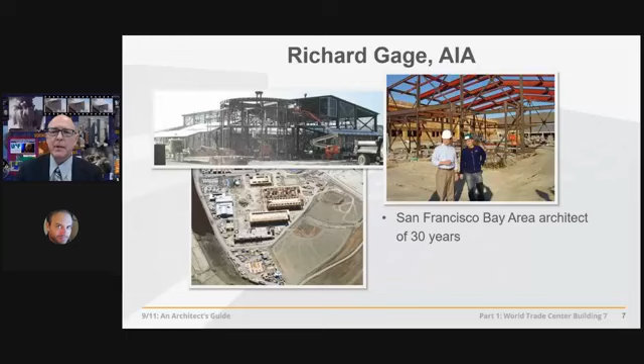Thanks, Andy. And just so people know something about my background, I was responsible at a local firm here in the San Francisco Bay Area for the construction documents for these $3 and $10 million gymnasiums and the construction administration for this $125 million high school. More recently, though, before launching full-time onto this important outreach effort, I had similar responsibilities working on this $400 million mixed-use project near Las Vegas with 6 blocks of retail, mid-rise office space, and parking structure, altogether about 1,200 tons of fireproof steel framing. I now work full-time educating architects, engineers, and others to understand what really happened at the World Trade Center using the material in these courses.

And so let's get into it. A lot of people didn't even know about Building 7. We go all around the country talking to engineers and architects at their conferences, and most are completely unaware of the third worst structural failure in modern history. I kid you not. This should be the most studied building failure ever. After all, it wasn't hit by an airplane, right? So if you didn't know about it, you're going to learn a lot. If you did know about it, we're going to brush up on the technical details so that you can share the information with others. Here's a 47-story skyscraper, easily the tallest building in most of our states.

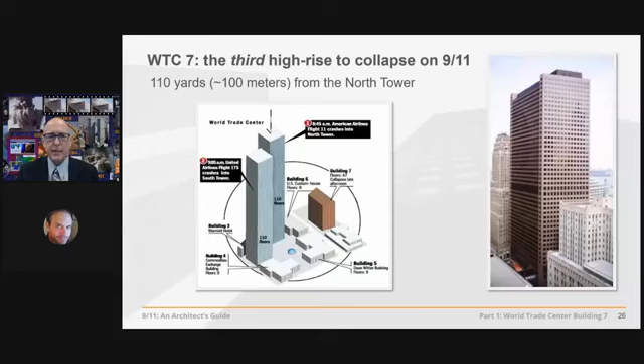The architect of record, Emery Roth and Sons, structural engineer Irwin Cantor, the developer Larry Silverstein. We'll get into him in a bit. It's part of the World Trade Center complex here in the northern part, and wasn't hit by an airplane. So it's a real important case study in structural failure. It was the third skyscraper to collapse. It's about 110 yards away from the North Tower. And it was hit by some of the laterally flying structural sections that were ejected out of the North Tower and started some fires, as you will see.

But here, the building is standing fine after the collapse of the towers all afternoon. So let's take a look at what happened to it here. The east penthouse falls first, and about 6 seconds later, the entire rest of the structure collapses. So we're going to be digging into this quite a bit today. So let's go to Shyam Sunder, the co-project leader of the NIST report, and see what the official story is here.

What we found was that uncontrolled building fires caused an extraordinary event. The collapse of World Trade Center 7 was primarily due to fire.

Fires? What fires? These fires, burning here at 2:30 p.m. on the east side of the building, burning here, same side of the building, and around the corner on the north side there, and over here also on the north side. So these fires are the worst fires that we have photographic or video evidence of.

And they progressed, by 2:30 or 3 p.m. they're moving away from the area associated with the initiation of collapse by NIST, under the east penthouse, because it collapsed first. They focused their collapse initiation theory there around column 79.

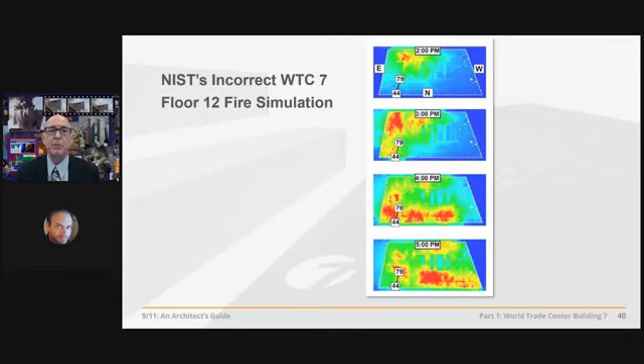Well, is that true? It can't be true, because NIST admitted itself that fires don't persist in any one area for more than about 20 or 30 minutes. In a modern high-rise building, that's all the fuel there is to burn. So they move on looking for fresh new fuel sources. As the photographs show, in fact, by 3:50 p.m., those fires are well beyond that area on the 12th or 13th floor, which is the focus of NIST's collapse initiation theory.

So we did our own fire simulation theory, and we note that the fire started, like NIST suggested, at 2 p.m., but it moved on. About 3 p.m., it's around column 79, and it's clear by 4 p.m., having moved toward the west. And in fact, on the floor, it's completely burnt out by 5 p.m. That's what the photographs and videos show.

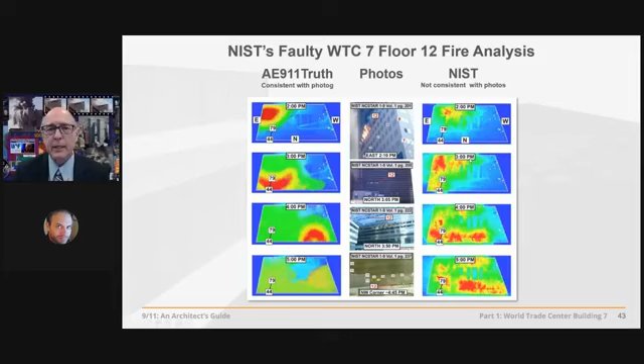And that's completely not consistent with the NIST fire simulation theory or their claims of massive fires in that area during the collapse. So that's just the beginning of the problems here for NIST. Let's see some of the others.

Our study has identified thermal expansion as a new phenomenon that can cause the collapse of a structure. For the first time, we have shown that fire can induce a progressive collapse.

Okay, so fires for the first time have caused a progressive collapse. And you can see on the screen, the column at the very right is column 79. And that's the column that first buckles, causing the floors to come down, followed by a quick succession of failures of adjoining columns. So this is their computer model, which they spent 6 years trying to refine, and it essentially debunks their own theory, and we'll get to that.

But what is their theory? That these long span beams, 50 feet long, in the fire were expanding just prior to the collapse due to the fire, which they say is burning at the time of the collapse. Well, we saw that those fires had burned out already, but they couldn't have expanded anyway because they're fireproofed. So we're halfway through the application of the fireproofing here. And we have 2-hour fire protection here, much longer fire protection than fires ever burned in this building. So they couldn't have been expanding.

But let's say they did expand. And this says they pushed this girder off of its seat on this column 79. Here's the girder. Here's the seat. Here's column 79. So that girder, though, could not have been pushed off of its seat because it would have had to have been pushed all the way off of that seat, 12 inches, in order for it to fall off.

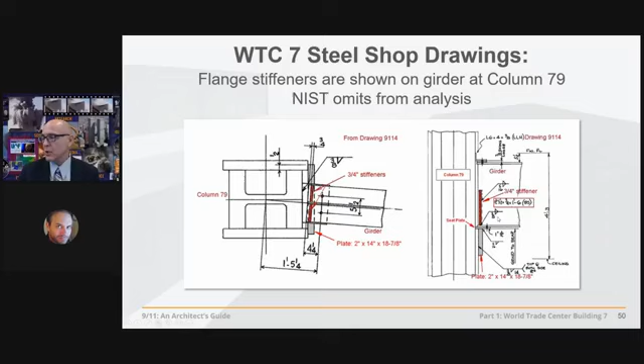call, they had to omit key structural components like these 3/4 inch stiffeners shown here in plan view and shown here in elevation view. They were there. They're on the shop drawings. So NIST omits them, citing that they were only there to prevent web crippling, so they didn't model them. Well, they would have also prevented that flange from folding at the bottom of that massive girder.

NIST also says that this girder got pushed anyway off of its seat. Well, it couldn't have been pushed off of its seat because there's 30 shear studs shown also on the shop drawings, which NIST somehow denies were there. So it's a real problem for NIST.

Also, they were there. And so this girder couldn't have just slid independently of the concrete slab up above because those shear studs tie that girder to the slab, and they were shown on the drawings. So this is clearly a fraud on the part of NIST. But let's go further.

Our study has identified thermal expansion as a new phenomenon that can cause the collapse of a structure. For the first time, we have shown that fire can induce a progressive collapse.

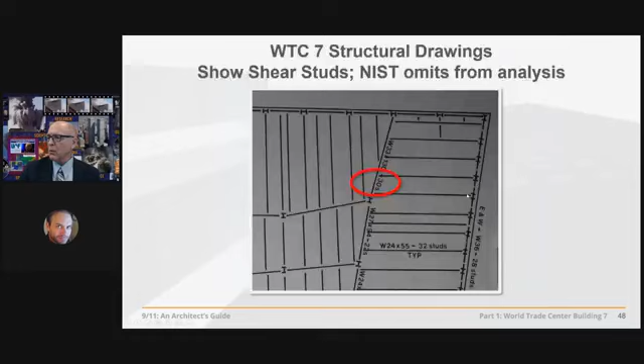Let's just say that all that could have happened, that the girder could have been pushed off the seat, and that it didn't have to be pushed off 12 inches, but only 6 inches, and it fell. Well, there's two other massive girders framed into this column, so they would have held that floor up.

But NIST somehow says, well, they all gave way too. But let's say that could have happened, and floor 13 fell on floor 12. And with what force would it have fallen? Well, it would have fallen with about 60,000 pounds of impact force. But that's 10 times less than what would be required to break the girder connections on the floor below.

Because they're framed exactly like the girder up above, as you see here, it would have taken 632,000 pounds to break that connection. But let's say that could have happened, and the connections were broken, and floor 13 fell on 12, broke those connections, and on for 9 floors.

Well, if that were the case, we would have had, NIST says, a massive caving in over those 9 floors, and that instability traveled all the way up to the east penthouse, which is why it starts to fall, and all the way down to the floor.

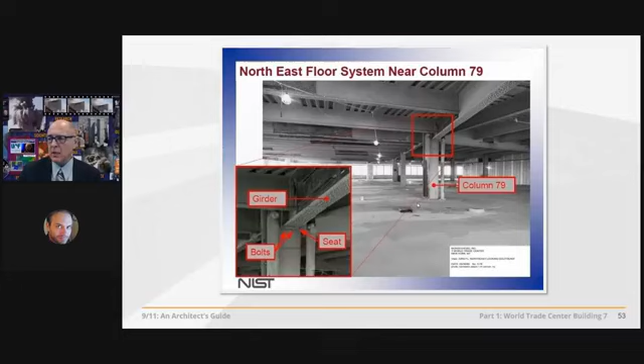Well, if you had such a massive set of structural failures on the east side of this building, you would have seen incredible deformation of the exterior structural steel frame. It would have crumpled up like a beer can, telegraphed to the outside of the building, which we didn't see in the photos or videos of this building's collapse. We would have had massive breaking up of granite panels and windows by the thousands. We didn't see that either.

Here's NIST's computer animation. Here's our structural model showing the building collapsing, which matches quite well with the video of the event.

Well, somehow the entire east side is collapsing in on itself. And what do we see here? The breaking up of 400 structural steel connections per second, like firing a hose on a sandcastle. And of course, they only model the east side, so we don't even know how that propagation of failures might have extended over to the west side, and they stop it after 2 seconds.

Let's look at it compared to the real video and see if it does match quite well, as Shyam Sunder says. The east penthouse matches, but from there on, it's a complete divorce. There's no breaking up of granite panels, windows on a massive scale, only about a dozen windows or so in the actual video of the collapse. And their computer animation stops after just 2 seconds. Why? They had 5 years to perfect this.

Well, it begins to tip over, as any collapse beginning lower in the building would be expected to do. But the video of the actual collapse betrays that theory of NIST. Something else is going on here, which we'll be looking at. So they simply stop their computer animation after 2 seconds.

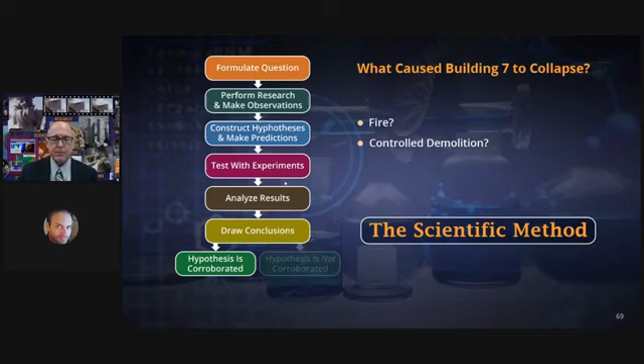experiments after making predictions, analyze the results, draw conclusions. If the hypothesis is corroborated, we report the results in an open, transparent manner so all can build on the body of the work that we do.

We report the results then in an open, transparent manner. We don't hide the computer input data from architects and engineers and scientists, citing that it might jeopardize public safety if we were to release this valuable data that we keep in our black box.

If the hypothesis is not corroborated, we go back and construct a new hypothesis that stands a better chance against the experiments, the observations, the research, the results, and the conclusions, until we have a hypothesis that is corroborated by all the above. So with that in mind, let's proceed and do some background research and find out how have other high-rise buildings come down.

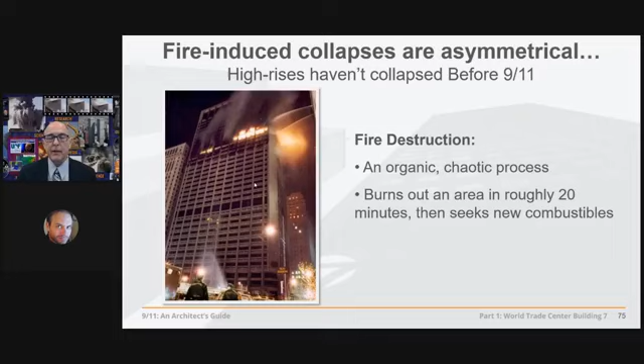Not due to fire, but say in a wood frame building, a fire being an organic, chaotic process, burns through an area in about 20 minutes or so, looking for fresh new combustibles. So NIST acknowledges that fires don't persist in any one area for more than 20 or 30 minutes, even though they claimed that in Building 7, they persisted for more than 2 hours in a particular area around column 79.

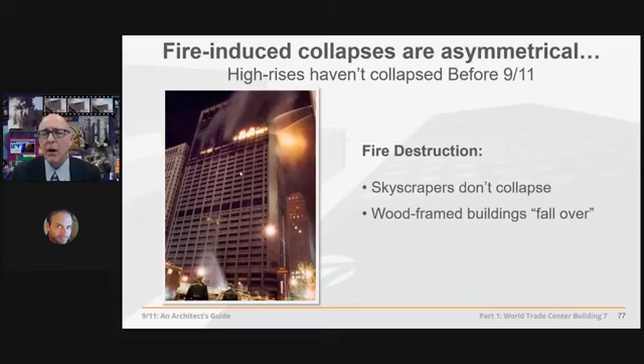So in a wood frame building, though, we would expect certainly some damage, and so they tend to fall over, to the path of least resistance after the fire burns out a structure asymmetrically, because this is a chaotic process. It doesn't just burn, or the collapse doesn't happen straight down through the tons of cold, hard structure below the fire. So what happens in a steel frame building?

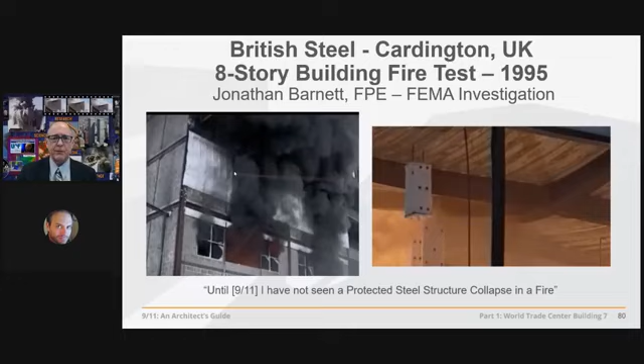Well, we have the largest test of its kind by British Steel in the UK. An 8-story building was set on fire, made out of steel, some of it fireproofed, some of it not. They found some astounding results in this fire. Let's take a look.

This was the largest test of its kind ever conducted. It showed how unprotected steel can be distorted, even by a normal office fire. But as is typical in steel buildings, the structural beams only slowly and progressively warped and sagged. There was no chance of a sudden collapse.

In over 20 years, I have not seen, until recently, a protected steel structure that has collapsed in a fire. Until recently, of course, he's referring here to 9/11, when we had not 2, but 3 protected steel structures collapse primarily due to fire.

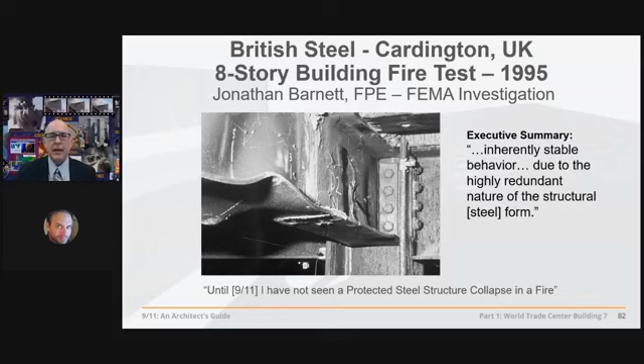Why don't steel frames collapse, even when they're not fireproofed, as we see here? The connections don't fail. The beams can sag, but they typically don't fail beyond the sag. Well, let's look and see why that might be true, because there's dozens of examples to choose from here.

May 4th, 1988, the First Interstate Bank, a 62-story building in Los Angeles, California, suffered a 3.5-hour fire which burned across 5 floors and caused an estimated $200 million of damage. It did not collapse. February 23rd, 1991, the One Meridian Plaza, a 38-story building in Philadelphia, suffered an 18-hour fire which burned across 8 floors.

The fire caused an estimated $100 million worth of damage, and 3 firefighters died fighting it. It was later described by officials as the most significant fire of the century. It did not collapse. October 17, 2004, the East Tower of the Park Central complex in Caracas, Venezuela, suffered a 17-hour fire which spread across 26 of its 56 floors. It did not collapse. August 18, 2007, a fire broke out on the 17th floor of the Deutsche Bank building

in New York, a building undergoing deconstruction after being heavily damaged by debris from the South Tower on 9/11. Originally 41 stories in height, it had been reduced to 26 at the time of the fire, which lasted 7 hours and affected a total of 10 floors. 2 firefighters died of smoke inhalation. It did not collapse. On 9/11 itself, 5 World Trade Center, a 9-story building east of the North Tower, was engulfed in flames after sustaining heavy damage from falling debris. A number of partial collapses occurred, but the overall structure remained standing.

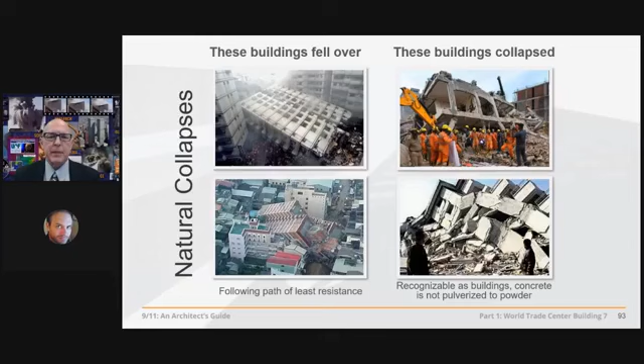They set shaped cutter charges at the columns and beams in the building and take out the structure within seconds, starting in the interior first and working themselves out in less than a second, usually to the exterior.

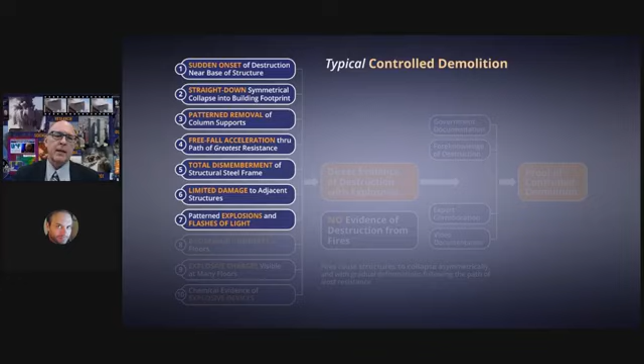And then that results in the total dismemberment of the structural steel frame, something natural collapses don't do, as we saw, resulting also in limited damage to adjacent structures. Ideally, that's one of the goals of controlled demolition. And there's a patterned set of explosions heard by witnesses, seen by them.

Broken up concrete floors. You don't want to have to go into this controlled demolition and manually jackhammer those floors up at all odd angles. Let the explosives do that work. So the floor is shattered.

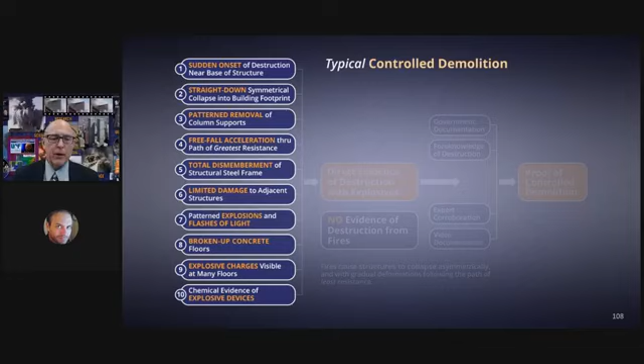Explosive charges, therefore, are left behind in the residue. We have evidence of them, and so chemical evidence of those devices, but also, with regard to feature number 9, explosive charges going off in the building, isolated explosive ejections called squibs, obviously explosives going off, which leaves behind chemical residue. So we look for those, and that is all direct evidence of destruction with explosives. None of it can be attributable by fire, let alone all of it. So if you have all these features, you know you have direct evidence of explosive destruction.

Fires cause structures to collapse asymmetrically with gradual deformation following the path of least resistance. So with additional circumstantial corroborative evidence, such as government documentation, that can be very helpful, foreknowledge of the destruction, by workers and engineers and so forth.

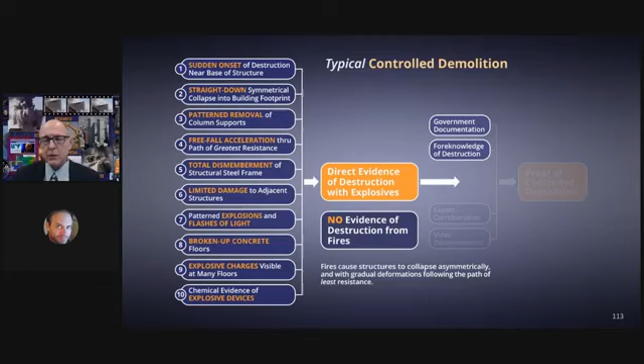Experts agreeing that was a controlled demolition—well, at least those experts without financial or political obligations which might sway their objective opinion on whether something's a controlled demolition or not. And video documentation, of course, all this can be proof of controlled demolition.

Now we're going to apply that model of proof at this time to Building 7 and see if we have these features. Let's begin with: is there a sudden onset of destruction near the base of the building?

Well, let's listen to Dan Rather as we watch this additional video of Building 7's collapse at 5:20.

It's amazing, incredible, pick your word. For the third time today, it's reminiscent of those pictures we've all seen too much on television before, when a building was deliberately destroyed by well-placed dynamite to knock it down. What? What did you say, Dan? Deliberately destroyed by well-placed dynamite to knock it down? Well, that's exactly what it looks like. We've all seen the old hotels in Las Vegas that come down due to controlled demolition, and as we'll see, there's no difference.

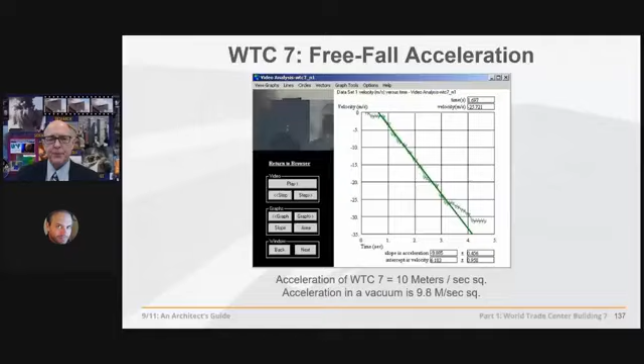This is pretty important. Let's listen to David Chandler, physics teacher. Just by watching it, anybody can see that Building 7 fell close to free fall. To measure it, I used software to track the corner of the building and compute a graph of downward velocity as a function of time. The graph had a long, straight section indicating constant acceleration. Measuring the slope, I found the acceleration to be within 1% of the acceleration of gravity for the first 2.5 seconds. In other words, the building fell through its own structure with zero resistance, as fast as a bowling ball falling out of the sky.

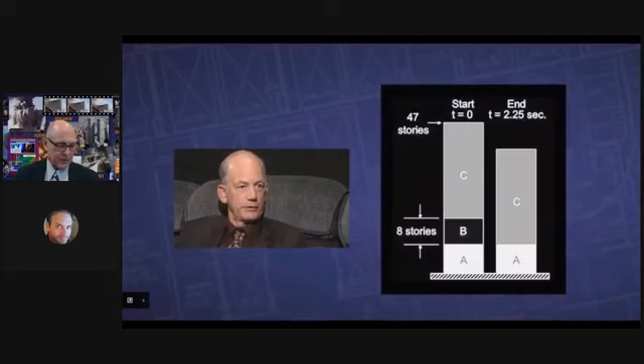This building had 40,000 tons of structural steel in its structural system, intended to keep it from going anywhere. NIST is telling us that the building below it ceased to exist for the first few seconds of the collapse. Well, things in physics just don't cease to exist and cease to resist the forces that are on them. The building didn't disappear, so the building can't fall for 100 feet at free fall speed. That's impossible. That's a violation of the fundamental law of physics that says that for every action, there's an equal and opposite reaction.

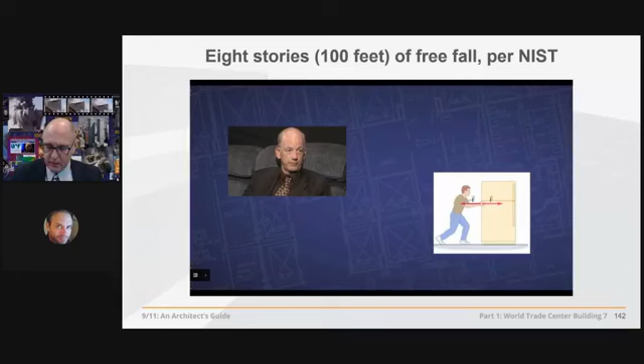Well, guess what? NIST was publicly embarrassed into acknowledging the free fall of this building, as fast as a bowling ball falling out of the sky, for a third of its 7-second collapse, because members of AE 9/11 Truth were there at the conference. They called them on it. They finally admitted it and actually published it in their report, but they don't acknowledge the implications of that. The implications are that if it fell at free fall, then the columns didn't buckle. Something else happened to them. They were removed instantly. How does that happen?

So we go further. Do we have feature number 5? The total dismemberment of the structural steel frame. Here we have a 47-story skyscraper, a moment-resisting structural steel frame where the columns and the beams are rigidly welded one to the other so they don't do this - columns, beams. And yet they're collapsing like a house of cards into a pile about 6 stories tall. How can that even happen? We'd expect a 20-story pile that wouldn't even look like pancakes. We'd expect it to tip over, not come straight down, like buildings that collapse due to natural causes, like earthquakes.

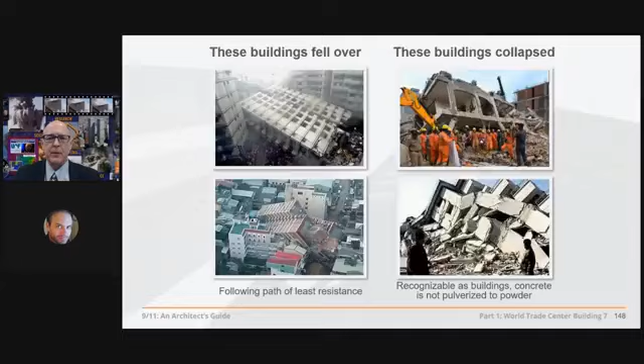Do we have limited damage to adjacent structures? Feature number 6, fairly limited damage, yeah. There's some damage to the post office and the Verizon building, but it's minimal.

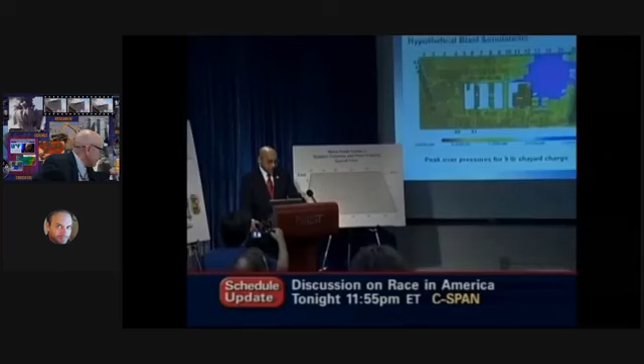Feature number 7, sounds of explosions heard by credible witnesses. Let's first go to NIST, the National Institute of Standards and Technology, who was tasked by Congress to explain these collapses to the American people. We did not find any evidence that explosives were used in the collapse of Building 7. We ran detailed computer simulations of blast scenarios. This size blast would have produced an incredibly loud sound that was not reported on videos of the collapse, nor reported by witnesses. No? Well, let's take another look here and see if that's actually true.

We were watching the building because it was on fire. The bottom floors of the building were on fire, and we heard this sound that sounded like a clap of thunder. We turned around and were shocked to see that the building - it looked like there was a shock wave ripping through it, and the windows all busted out. It was horrifying. About a second later, the bottom floor caved out, and the building followed after that - we saw it crash down all the way to the ground. We were in shock, and then the worst part. Wow. A shock wave ripping through the building, a sound like a clap of thunder, windows busting out, and then the building coming down.

How about this witness?

And then it was like another 2-3 seconds. You heard explosions, like boom. It's like a distinct sound. It's not like when in compression, like boom, boom, boom, like floors that were dropping and collapsing. This was boom, and like you felt a rumble in the ground, like almost like you wanted to grab onto something. That, to me, I knew that was an explosion. There was no doubt in my mind.

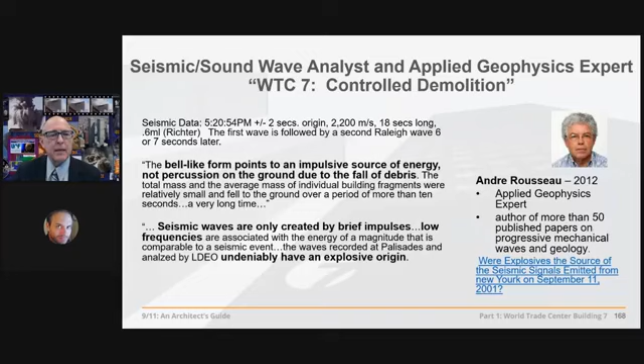Well, let's go to Andre Rousseau, applied geophysics expert, author of more than 50 published papers on progressive mechanical waves and geology. What does he say? The seismic data, he says, has a bell-like form. It points to an impulsive source of energy, not percussion on the ground due to the falling of debris, especially spread out over many seconds, according to the NIST theory, 30 seconds or so. Seismic waves are only created by brief impulses, low frequencies. These undeniably have an explosive origin.

So that's his conclusion. So we move on to feature number 8, the pyroclastic-like clouds of pulverized concrete. What? Well, the National Fire Protection Association Guide 921 for Fire and Explosion Investigations says look for large volumes of gas and the large amount of heat released in chemical explosions, causing rapidly expanding plumes of hot gases.

So this would be something different than high energy explosions. What are we getting at here? Well, as seen from every direction racing away from the collapse of Building 7, just like in the Twin Towers, actually, 35 miles an hour, these rapidly expanding cauliflower-shaped plumes of expanding gases with this solidly defined edge, this rapid expansion is an indication of an incredible heat source fueling it.

What could that be? This is only our first look at this. It's not these small scattered fires that we see in Building 7 prior to the collapse. Surely those would have been extinguished in the collapse itself. We're talking about something on the order of this, an incredible heat source.

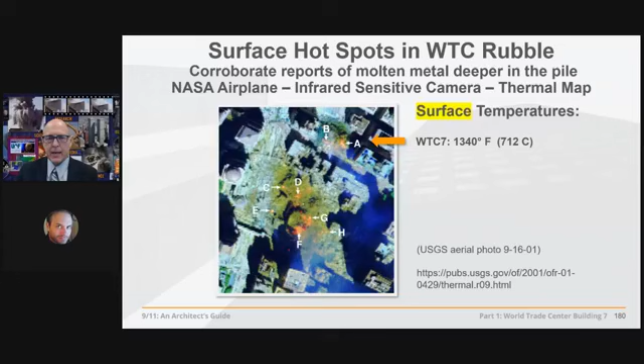Let's look further at feature number 9, molten steel and iron. What are we talking about here? Well, documented by NASA's infrared sensitive cameras, thermal imaging, documenting incredible temperatures on the surface of this building's collapse of 1,340 degrees Fahrenheit. Well, there's no fire on the surface. The fire was surely put out by the collapse of the building.

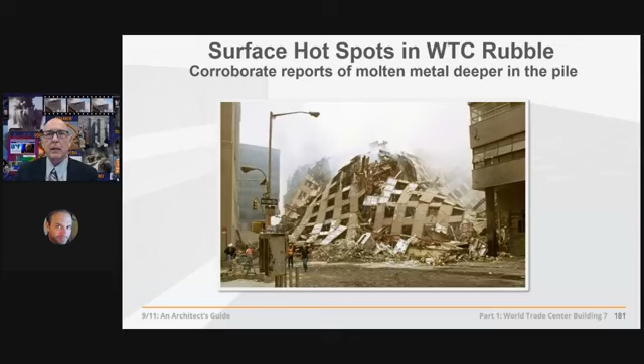So what's burning here? Something deeper down in the pile that's much hotter than these temperatures, that when it rises to the surface, it actually is cooling down to 1,340 degrees. Let's look deeper. Here's Abolhassan Astaneh-Asl, who was a professor at Berkeley's structural engineering department, and he had unlimited access to the Fresh Kills landfill, at least before they took the steel away from him while he was looking at it. But what does he say?

I saw melting of girders in World Trade Center. I saw melting of girders in World Trade Center.

Well, wait a minute. Girders don't melt at fire temperatures, normal office fire temperatures, of which 1,340 degrees is one of the hottest office fires that occur. Normally they're around 500 or 600 degrees. So what can melt steel girders? We're talking over 2,800 degree Fahrenheit temperatures,

prompting the author of the FEMA report, Jonathan Barnett, who says steel members in the debris pile appear to have been partly evaporated in extraordinarily high temperatures. Well, it takes 4,000 degrees Fahrenheit to evaporate steel. That cannot possibly be accounted for by office fires. We're talking at least 4 times the temperatures created in modern office fires.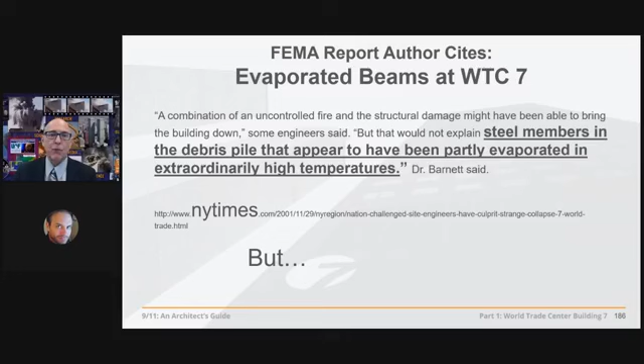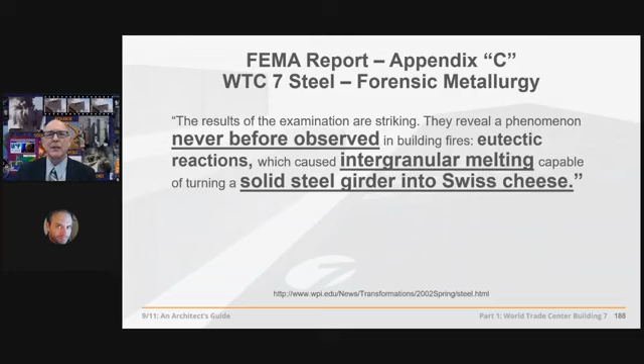So we go to FEMA Appendix C, produced by FEMA for Building 7 and the Twin Towers. Appendix C, in their May 2002 Building Performance Assessment Report, produces a limited metallurgical examination. So this should be revealing. What do they observe? Never before observed eutectic reactions, intergranular melting, capable of turning a solid steel girder into Swiss cheese, like we see here in this piece of Building 7 steel.

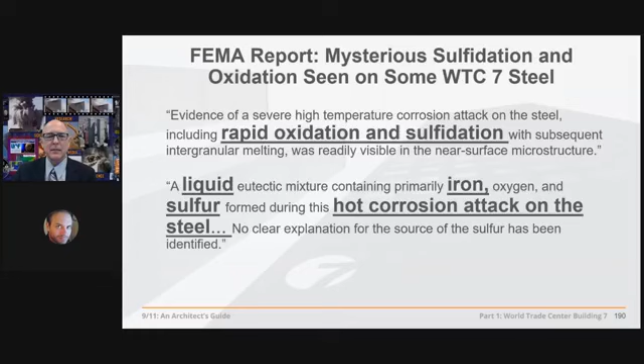How can that possibly happen due to fires? Office fires, not even jet fuel, melt steel. And remember, no plane hit this building. We have rapid oxidation, sulfidation, liquid iron, that's molten iron, 2,800 degrees Fahrenheit. Hot corrosion attack on the steel. Perhaps the deepest mystery uncovered in the investigation, says the New York Times, and yet it's completely ignored by NIST.

In fact, it was removed in the NIST report when NIST took over this investigation in 2002 from FEMA and then produced their report 6 years later. What do they say? Well, we couldn't test. There's no steel recovered. Again and again. No steel recovered from Building 7.

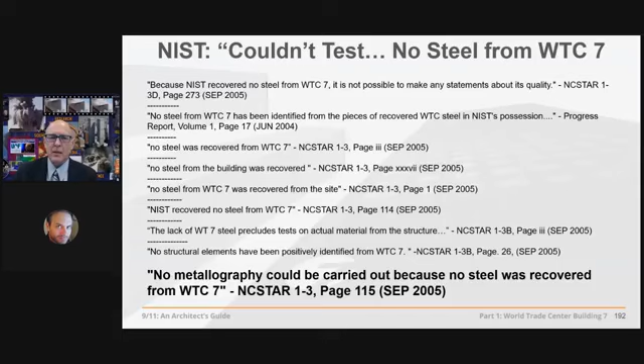But we just saw the actual piece of steel provided to FEMA by John Gross, the co-project leader of the NIST report, who's here photographed with that very piece of steel that they documented and found liquid molten iron, hot sulfur corrosion attack on the steel that's capable of doing this. His shadow is all over the evidence.

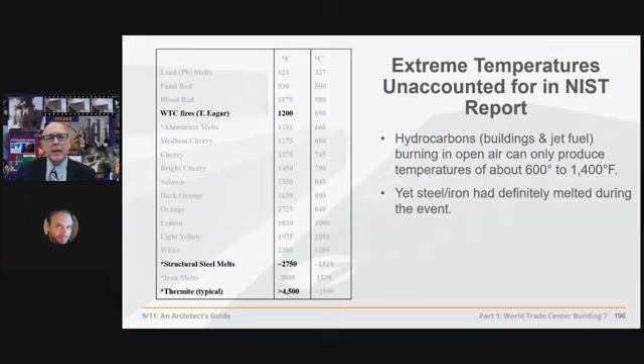Well, what can account for this? I mean, hydrocarbons, which are in buildings, and even jet fuel, only produce 600 to 1,400 degree temperatures, more typically 500. Yet steel had definitely melted during the event, as we see here in the material pouring out of the debris held in the jaws of this crab claw excavator. The physics tells us the temperature of liquid molten materials like this. We're exceeding 2,500 degrees. Liquid molten iron, white hot even, pouring out of there.

How can it be accounted for? So what caused it to melt? Let's look for something that can. How about thermite? That's a possibility, because thermite produces these characteristics, as you'll see. Could it have produced this? Well, what is thermite anyway?

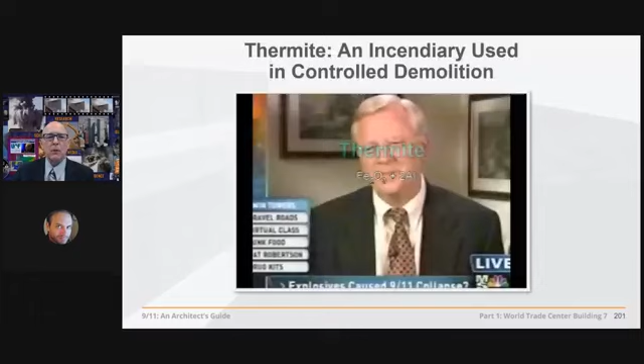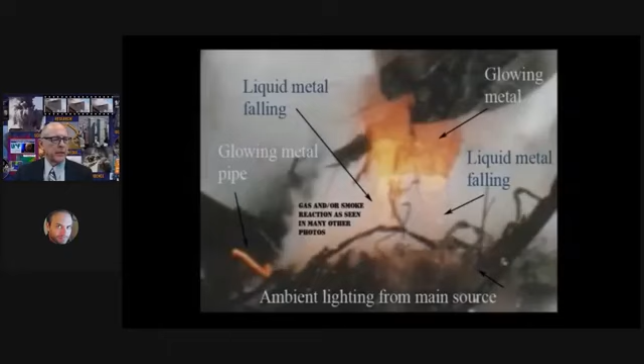An incendiary used by the military, thermite is a compound of iron oxide and aluminum, which when ignited sustains an extreme heat reaction, creating molten iron. In just 2 seconds, thermite can reach temperatures over 4,500 degrees Fahrenheit, quite enough to liquefy steel. We know that open-air fires cannot burn hot enough to melt steel, but metal had melted at the base of the towers.

Appendix C of the FEMA report describes sulfur residues on the World Trade Center steel. The New York Times called this the deepest mystery of all. Sulfur slightly lowers the melting point of iron, and iron oxide and iron sulfide had formed on the surface of the structural steel. Sulfur used with thermite is called thermate, producing even faster results.

Hey, maybe we're getting somewhere here, because if thermite were used, it would explain the incredible heat. It produces 4,500 degrees as its byproduct. And what does it produce? It produces liquid molten iron at those temperatures. And we'll see plenty of evidence for liquid molten iron coming up.

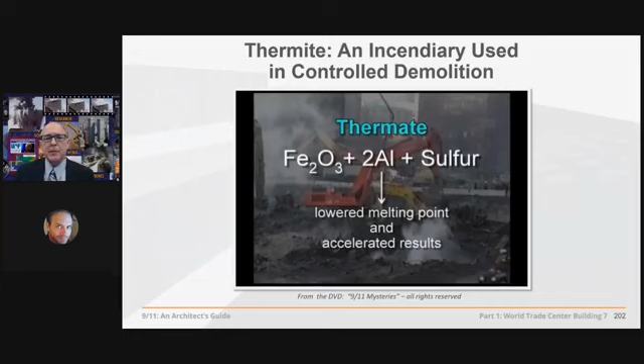It would also produce sulfur, because sulfur is added. It would account for the sulfur that FEMA found in Appendix C. Sulfur is added to thermite to become thermate, much more effective at cutting through steel. So this is absolutely extraordinary. But is there evidence for it?

Well, did NIST investigate for such things? No, they didn't, as you'll see. But others did. And Stephen Jones, professor, says, look for unusual residues that could arise from thermite or magnesium. NIST found no corroborating evidence to suggest that explosives were used. Well, wait a minute. Did you look?

A year later, they acknowledged in writing, NIST did not test for the presence of explosive residues. Wait a minute. You can't find what you're not looking for or won't look for. Others did, though, and it wasn't that hard to find. Stephen Jones, a nuclear physicist formerly from Brigham Young University, is sent some material from the ends of the beam provided to him by the sculptor of one of these many sculptures that were done throughout the United States and around the world.

One of the first things that Stephen notices is that you don't have this crazy jagged pattern in the ends of the steel beams produced by the iron workers at the site cutting the steel beams. They produce very efficient lines with their oxyacetylene torches and thermal lances, not these crazy zigzags. So there's something else going on here.

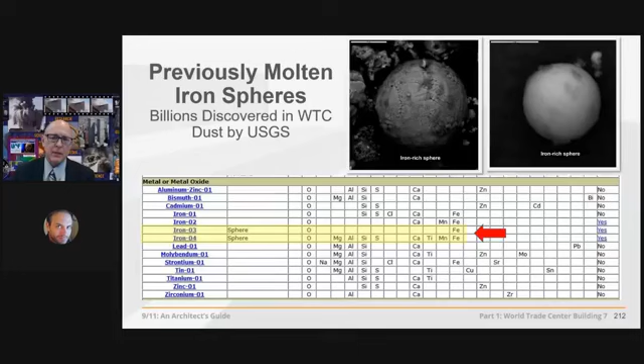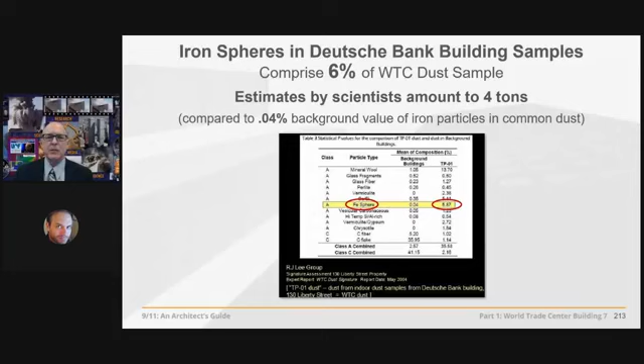This is really curious. Up to 6% of the World Trade Center dust samples are composed of these previously molten iron microspheres, amounting to up to 4 tons by extrapolation from how many they find in the actual samples. 150 times the background level of iron particles in dust, which you can get in background dust, as you see here in this sample. But it's not spherical. So something else is going on here.

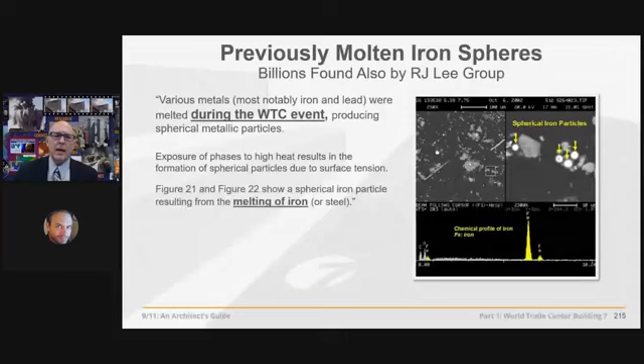R.J. Lee finds that these are formed during the event, not before by the construction workers welding, not afterwards, after 9/11, by the iron workers cutting with steel torches, but during the event. So they're so ubiquitous that they're used by the EPA as a signature component to distinguish World Trade Center dust from common office building dust.

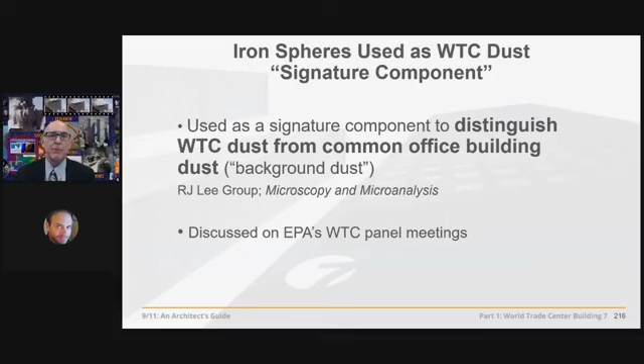Well, how would they even get in the dust? What's one possibility? Well, here's a controlled experiment using thermite. Under controlled conditions, we see here, slowing it down halfway, thousands of sparks. Well, those aren't really sparks. Those are liquid molten iron spheres that cool and fall as spheres in the dust. Why does that happen? Well, aerosolized liquids form themselves by surface tension into these extremely small droplets, magnified here.

That can account for the process if thermite were used under explosive conditions. That liquid molten iron would be aerosolized, and it would fall on the tops of the cars and the ground, toasting them. Perhaps that's a reasonable explanation as to the toasting of the tops of these cars in this extremely high heat event at the World Trade Center.

What other rational explanation is there in this high heat, extreme heat event? Well, you can make shaped cutter charges out of thermite in your own backyard, as civil engineer John Cole did. And this is what you get. And here's the process.

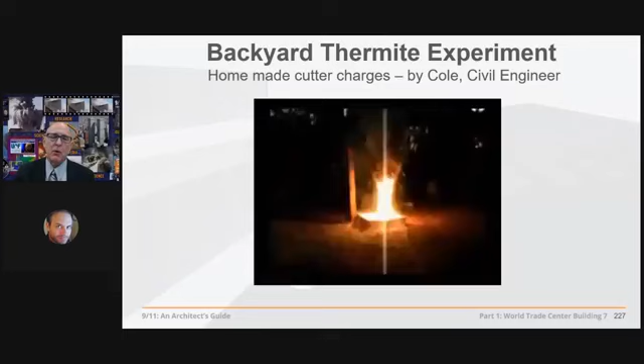So the explosions are heard, but they're actually muted, and they can cut through steel beams, as you see here.

Well, there are devices that are much more sophisticated than John Cole's backyard experiment. They're patented devices, shaped cutter charges that issue molten iron in hundreds of milliseconds through structural steel, much thicker sections than high energy explosives like C4 and RDX can penetrate. So perhaps that's one of the reasons that thermite cutter charges were used here. And we'll be showing you the evidence of this.

But why wouldn't they use C4 or RDX, traditional high energy explosives? Why else might they not use that? Well, they provide an extremely loud audio signature, a loud bang, and a visual signature, an extremely bright flash. So maybe they wanted to avoid that by going to something that would leave less evidence.

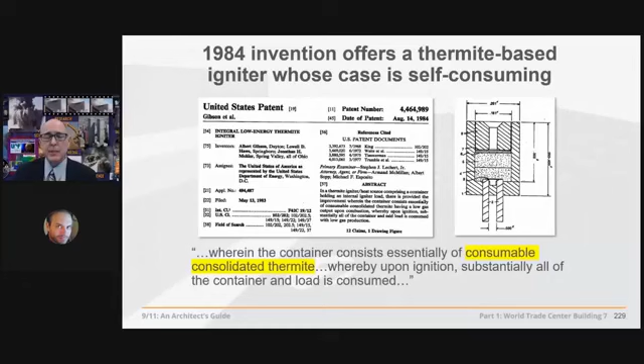In fact, there are devices patented prior to 9/11 whose casings themselves are made out of consolidated, consumable thermite, which would be consumed, leaving only molten iron as the byproduct. Well, pools of molten iron are discovered throughout the World Trade Center, as we'll see in next week's episode 2 of this 3-part series, 9/11: An Architect's Guide.

But what else was found in all this World Trade Center dust? A team of scientists led by Niels Harrit in Copenhagen collected 7 samples from around the World Trade Center, including a sample from across the street from World Trade Center 2, from Janette MacKinlay's apartment.

She collected it. She was an artist. She paid for that decision with her life later, as she was working with this dust in sculptures, part of her own therapy for having been traumatized when her windows blew in from the tremendous explosive force of the South Tower. She succumbed to brain cancer years later.

Very tragic. But her sample, provided to Stephen Jones, is one of the 4 samples documented in the peer-reviewed study. Up to 10 tons of this material was estimated to be in all the World Trade Center dust, by extrapolating the amount found in the dust samples they collected.

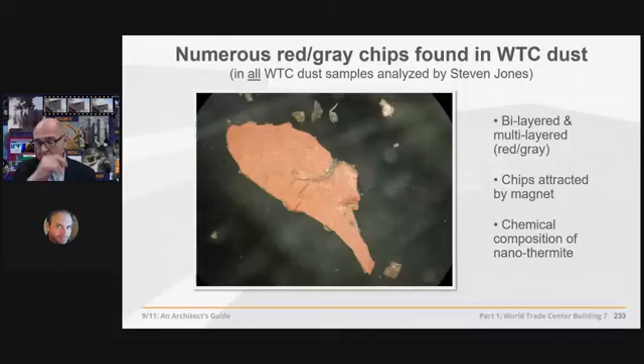These huge quantities of this material: it's red on one side, gray on the other, dual-layered red-gray chips, and it's attracted by a magnet. So they get very curious and zoom into the red layer, studying it with X-ray energy dispersive spectroscopy, finding aluminum and iron — the signature of unignited thermite. Thermite is made of aluminum and iron oxide particles, basically rust and aluminum, finely mixed.

And here with silicon, oxygen, and carbon — we'll come back to that. So they get even more curious and zoom into the red layer 50,000 times, finding nano-sized particles, 1,000 times smaller than the diameter of a human hair: particles of iron oxide crystals and aluminum platelets, the ingredients of thermite, set in a bed of oxygen, silica, and carbon.

Organic material is used in the explosive TNT; it's what causes the expansion of those gases. Here it's used as the matrix for these other incendiary materials. So we appear to have something engineered to become more explosive and incendiary, which works by means of heat — massive heat, 4,000 degree temperatures — to become even more explosive.

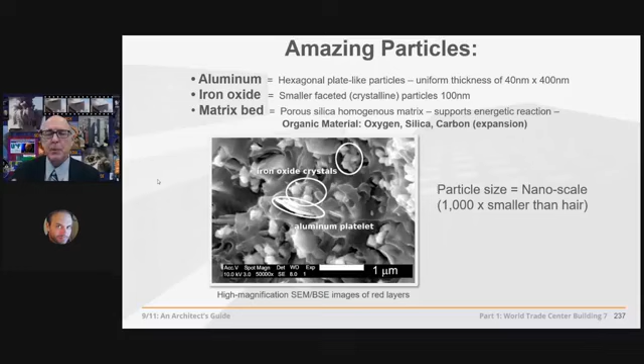The documented literature shows that their samples, in exothermic reactions, produce temperatures around 420 degrees Celsius, 788 or so Fahrenheit. They react. Well, here in these traces collected by the international team, we find that they do the exact same thing.

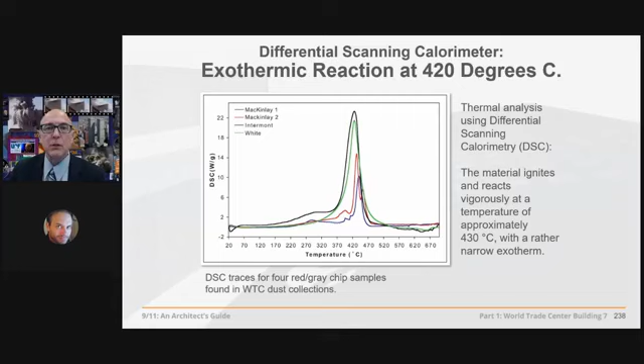They ignite. What happens when they ignite? They produce molten iron microspheres with the same chemical signature as the molten iron microspheres found in the World Trade Center dust. So we know where those tons of molten iron microspheres came from.

There's no question they came from these dual-layered red-gray chips, because there's no other source that FEMA, NIST, or anybody else has fingered as a possible suspect that makes any sense. So we have a self-corroborating, repeatable set of experimental data that could put a lot of people, the real perpetrators, away for a long time for mass murder and treason, which is where this evidence is heading.

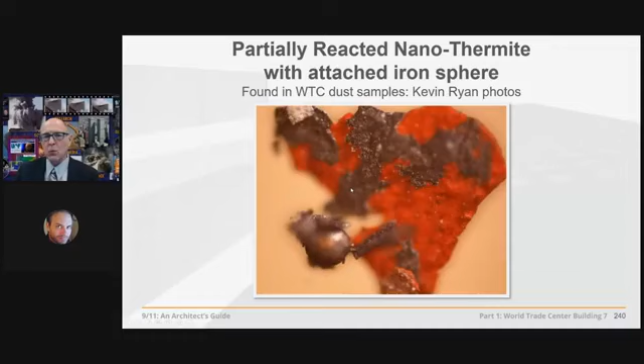As if we didn't know where these spheres came from. They're found attached to partially ignited red-gray chips, as you see here and here. When we make nanoparticles like this, the surface area increases exponentially as the size of these particles decreases, so you have instantaneous reactions.

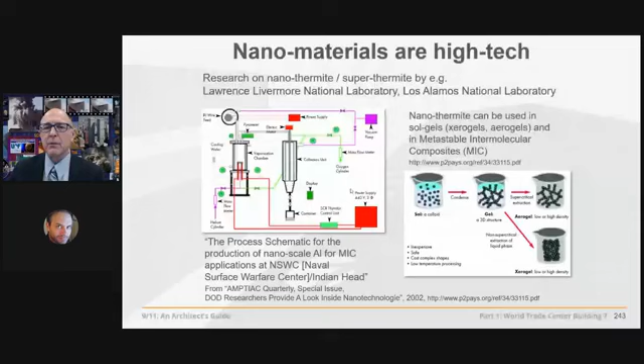So an incendiary has been engineered to become more explosive. It's not made in a cave in Afghanistan. It's an extremely sophisticated process made only in the most advanced defense contracting laboratories. They conclude in the Bentham Open Chemical Physics Journal, in this 25-page peer-reviewed paper, that the red layer of the red-gray chips is active, unreacted thermitic material incorporating nanotechnology. It's highly energetic, pyrotechnic, or explosive material. So NIST has been proven wrong for the 24th time.

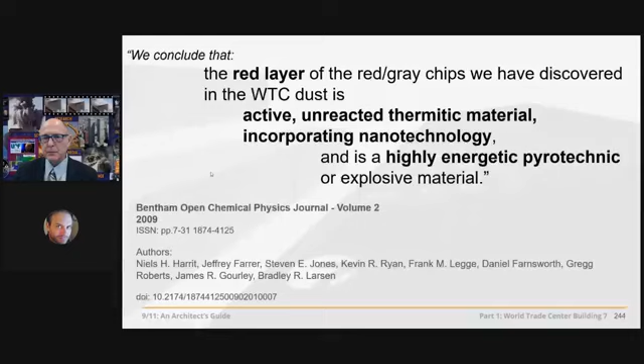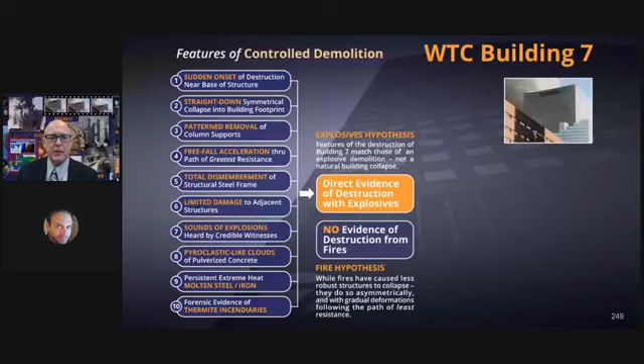There is evidence of explosives or incendiaries, more likely incendiaries in this case of Building 7. Features 1 through 10 have been shown as direct evidence of destruction with explosives. Fire doesn't create these features, any of them, let alone all of them. Fires have caused less robust structures to collapse, but they do so asymmetrically with gradual deformations, and they fall to the path of least resistance, or over.

So why don't we have steel frame buildings collapsing due to fires? Well, steel conducts that heat away from its source, so it never gets to the 1200 degree Fahrenheit temperature where steel can lose half of its strength and begin to sag. Typically, that doesn't happen.

But to keep that from becoming a problem, we fireproof the beams with 2-hour fire protection on the beams, 3 hours on the columns. Remember, that keeps the building safe from fires, which can persist in one area for only 20 to 30 minutes, even as acknowledged by NIST. We also keep the tenants or contractors from building out of combustible materials, so we don't build high rises out of wood, for instance. And we also sprinkler these buildings to keep all of that from ever becoming a problem.

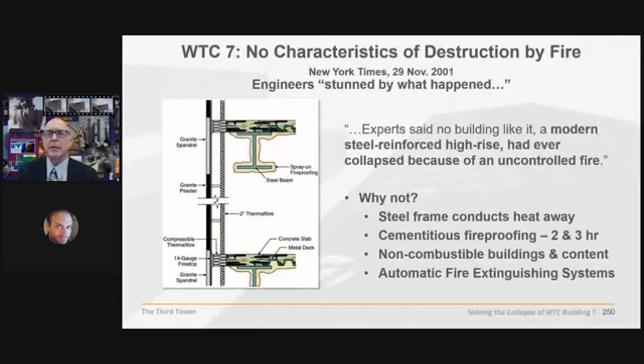In the case of Building 7, we're told that the sprinkler main serving the building was damaged by the collapse of the Twin Towers. We don't argue that point, although it could be argued.

So what about these official investigations? From FEMA in 2002, with $600,000 of funding, our efforts were hampered. According to the New York Times, they didn't have access to the building, they didn't have access to the steel, they didn't have access to the blueprints of the buildings. This is absolutely ridiculous, and the steel was gone before they could properly examine it, as we'll see.

In 2008, NIST produced their own report, threw out that Appendix C metallurgical examination, and all of the valid evidence there of the hot temperature corrosion attack on the steel, while admitting, truthfully, 'we've had trouble getting a handle on Building 7.' And again, throwing out this report documenting silver dollar size holes that normal office fires can't produce in Building 7 steel, they say further research, investigation, and analysis are needed to resolve the issue of this building's collapse.

Unfortunately, though, for those hoping to resolve the issue, we have, in easily the largest and most perplexing structural failure in history, the destruction and removal of evidence at 400 truckloads a day, starting just two weeks after 9/11. This is the illegal destruction of evidence in a crime scene, prompting editor-in-chief of Fire Engineering magazine, Bill Manning, to cry out: crucial evidence that could answer many questions is on the slow boat to China, showing an astounding ignorance of government officials to the value of a thorough scientific investigation. The destruction and removal of evidence must stop immediately.

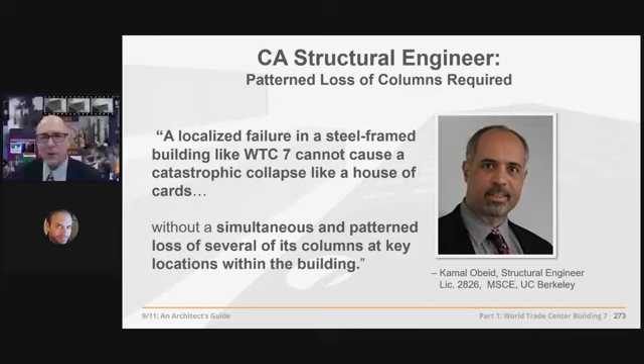And like the University of Alaska Fairbanks, who for the last 4 years has been studying the collapse of this building and has issued its final report, which you can find on our website at ae911truth.org. They studied it with two different software programs.

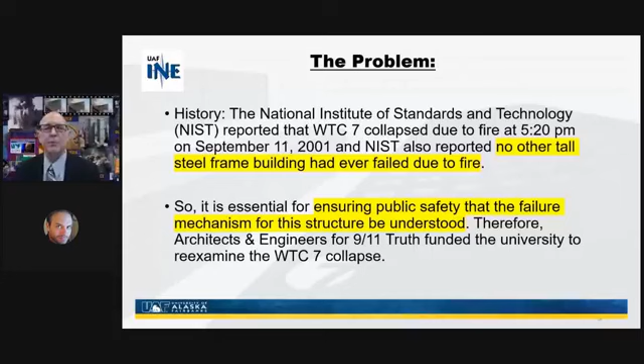They found, first of all, that there's a big problem here: no other tall steel frame building had ever failed due to fire, completely failed. So it's essential, they say, to ensure public safety, that the failure mechanism for this building be understood. How could it be understood easily if NIST withheld their computer input data?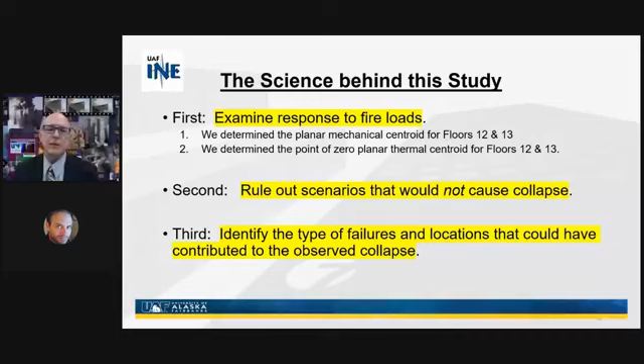But we had enough data to do an independent analysis here, a finite element analysis. So they examine the response to the fire loads using NIST's fire loads. They rule out scenarios that would not cause the collapse. And the science behind the study, their third approach, identifies the types of failures and locations that could have contributed to the observed collapse.

They used all the same data that we had available from NIST. The methodology, using these three approaches, was to simulate the local structural responses to fire loading for floors 12 and 13, as NIST did; examine the NIST collapse initiation hypotheses with that data; and simulate numerous failure scenarios that could have led to the total collapse as observed on 9/11.

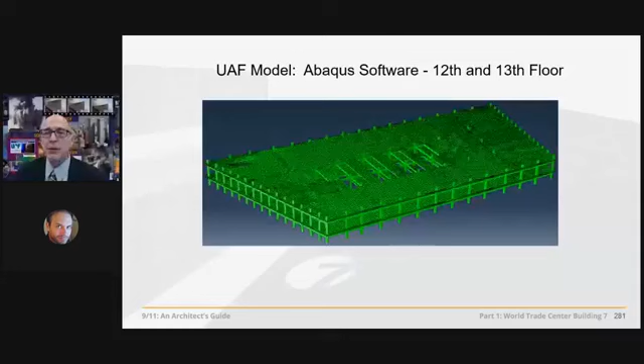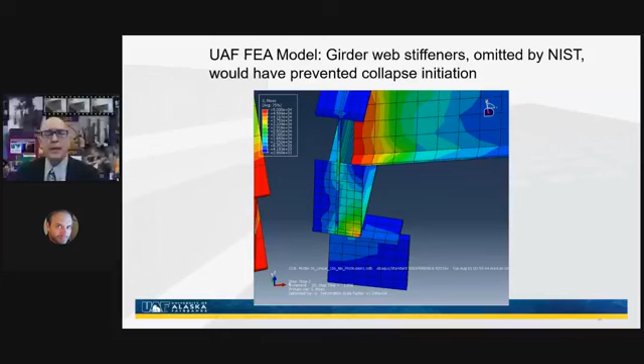So they modeled the building first in AutoCAD and then Abaqus, and then also modeled it in SAP2000. Using the same collapse initiation scenario NIST used that we discussed earlier, they found some startling conclusions that completely reverse NIST's collapse scenario.

First of all, they found that NIST overestimated the exterior wall rigidity, making it infinitely stiff, which forced the expansion to the inside, as NIST claims, moving that girder off its seat 6 inches. But the movement of the seat was in the opposite direction when adequately and non-fraudulently modeled by an independent team.

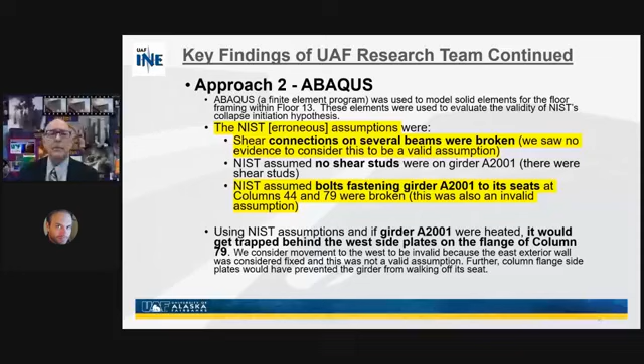NIST's erroneous assumption that the shear connections on several beams were broken was proven not true. They assumed no shear studs, as we discussed, but they were there. The bolts fastening the girder to its seat were not broken in the actual modeling that University of Alaska Fairbanks did. And in approach 3, using SAP2000, they found that column 79 didn't fail, and neither did 80 or 81.

But if those columns had failed, the building would have tipped over—it wouldn't have come straight down as NIST claims. It would have tipped like this, as you see in the UAF modeling. But the video doesn't show that. The video of the actual building's collapse shows something else, as I'll show you.

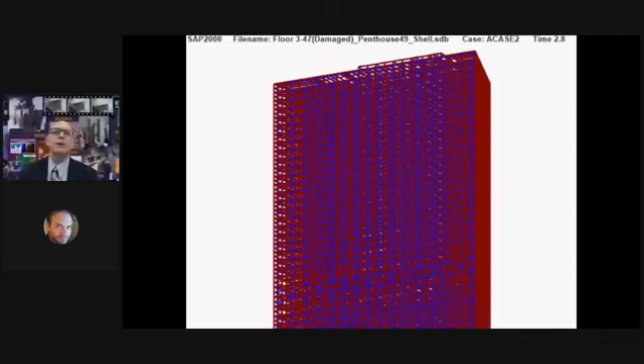So they conclude the collapse of Building 7 was a global failure, not a progressive collapse involving the sequential failure of columns, but a global failure, as you see here, which does in fact match the videos. The building does collapse straight down when you take out the columns.

Well, let's go in order. Fire did not cause the collapse of Building 7. Temperatures were not high enough in the fire to cause the weakening of the steel structure, consistent with previous high-rise fire behavior. Thermal expansion did not result in the loss of support for the beams and girders. World Trade Center 7 did not experience a progressive collapse as claimed by NIST.

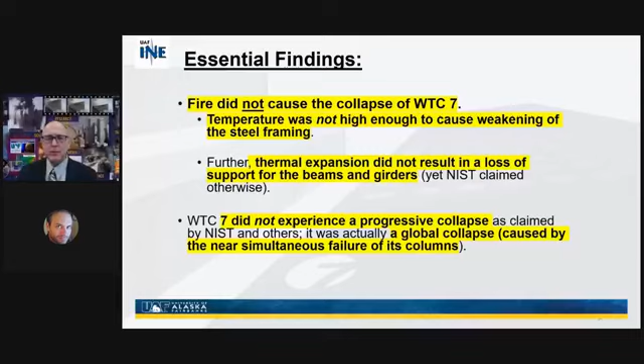I keep thinking we can get this video to show you, but not so.

There we go. Yeah, here you go.

NIST has completely pulled the rug out from underneath themselves. Excuse me, the UAF, University of Alaska, has completely pulled the rug out from underneath NIST in their theory that this building came down due to fire. And we're getting this out now to all the universities and affiliations of structural engineers and architects around the country, and to Congress people too, to get a real investigation.

Foreknowledge of the building's destruction. Well, yeah, this anonymous engineer is consulted by Chief Hayden: if we allow it to burn, could we anticipate a collapse? Well, never before have we had the collapse of an office building due to fire, and all of a sudden they consult this engineer who says there's structural damage from the beams that hit the building from the World Trade Center. And in its current state, you have about 5 hours, he confidently declares.

Wait a minute, who's this structural engineer? We don't know. Chief Hayden will not release the name of the structural engineer who predicted this collapse almost to the minute. Of course, this prediction could only have been made with foreknowledge of the building's collapse.

What other foreknowledge do we have evidence of? How about these mysterious construction workers walking away from Building 7, hearing an explosion over their shoulder, looking back at the building, then looking straight into the CNN camera and saying this.

Keep your eye on that building. It'll be coming down. The building is about to blow up. Move it back. All right, guys. Sorry. We are looking back. There's a building about to blow up. No flame, debris coming down.

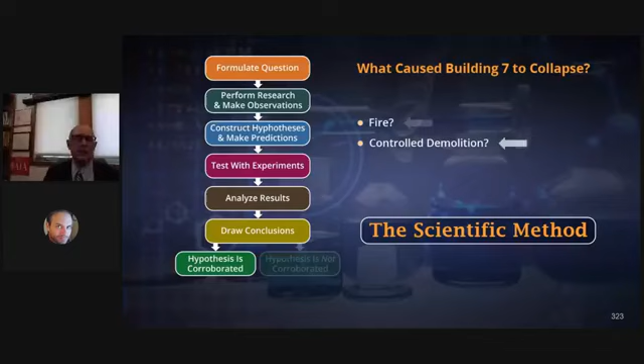So let's put it all together here. The scientific method shows us that the hypothesis of fire or the hypothesis of controlled demolition is indicated.

You have to make that decision. I've made my decision. 1 million 9/11 truth advocates have made that decision, and several million others around the world see the features of controlled demolition satisfied by this evidence, features 1 through 10, and some very uncharacteristic features of controlled demolition as well, as you've seen, of course, the incendiaries.

This is not direct evidence of destruction by fire. It's direct evidence of destruction with explosives. Fires cause less robust structures to collapse, and again, they do so asymmetrically with gradual deformation following the path of least resistance.

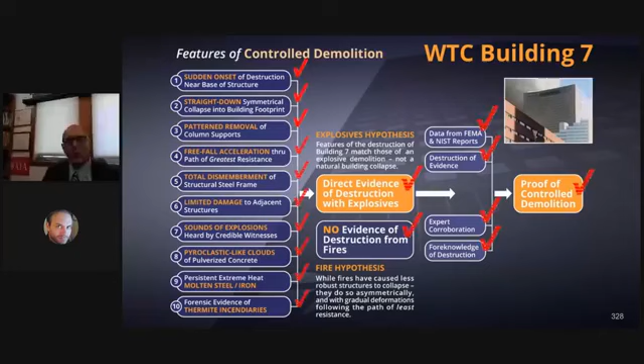With additional circumstantial corroborative evidence, we find that this is direct proof of controlled demolition. So we want to leave you with that and ask you, is that proof for you? Because, gosh, it doesn't matter what we think. We want to educate the public and the professions and the media and the government.

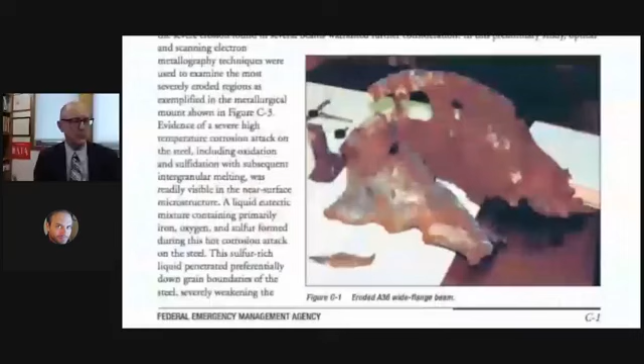What I saw was a classic implosion. The center of the core, the penthouse area, starts to move first, and then the building follows along with it. NIST excluded the document from FEMA Appendix C that documented the evidence of melting steel. In an office fire, you cannot generate enough heat to melt steel.

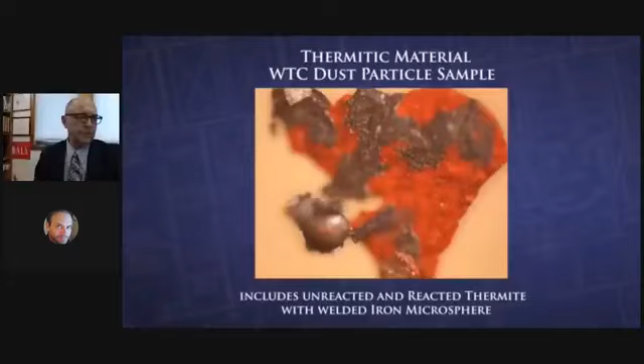There were these iron microspheres present in all of the dust samples. They needed to have been formed in extremely high temperatures. All the characteristics of the microspheres, along with what I see in the attack of the beams that were actually found, tell me that thermite was involved. In the dust, what we have found is a modern version of thermite, which we call nanothermite.

NIST concedes that they found no evidence for explosives. So then we asked them, well, did you look? And they said no, we did not look for explosives or residues of explosives. And in fact, the evidence is overwhelming that these red-gray chips are very high temperature incendiaries. And we have watched as scientific integrity has been undermined. Scientific research politicized in an effort to advance a predetermined ideological agenda.

If this is a crime, I think everybody agrees it's a crime. Evidence was removed from the scene of the crime. You can't do science when you are deprived of the evidence and when your hypothesis is the least likely instead of the most likely. And the most likely hypothesis in the case of Building 7 wasn't even mentioned. This is not science. And right on, it's not science.

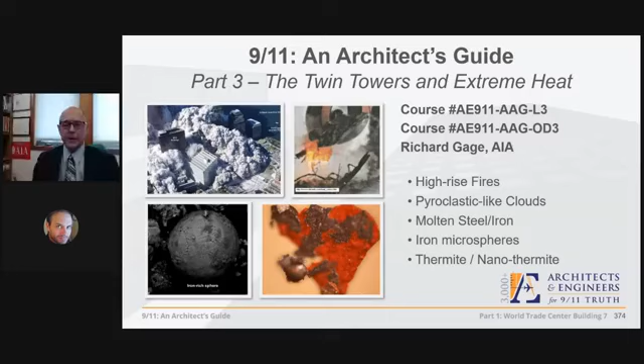This was part 1 of 9/11, An Architect's Guide, World Trade Center Building 7. As I mentioned, next Thursday, 1 p.m. Pacific, we'll jump into part 2, the Twin Towers explosive destruction, which will be looking at the actual explosions, witnesses of explosions, hundreds of them, sudden near free fall collapses, high velocity lateral ejections, shattering of the structural steel frame, the midair pulverization of the concrete. Very, very incredible evidence that has convinced millions of people, along with the extreme heat, which is 2 weeks from today. High-rise fires, pyroclastic-like clouds, molten steel and iron. We go into much more detail than we're able to go into today on the iron microspheres, the thermite, and the nanothermite. So I encourage everybody to come back, and we'll get a notice out too and let you know.